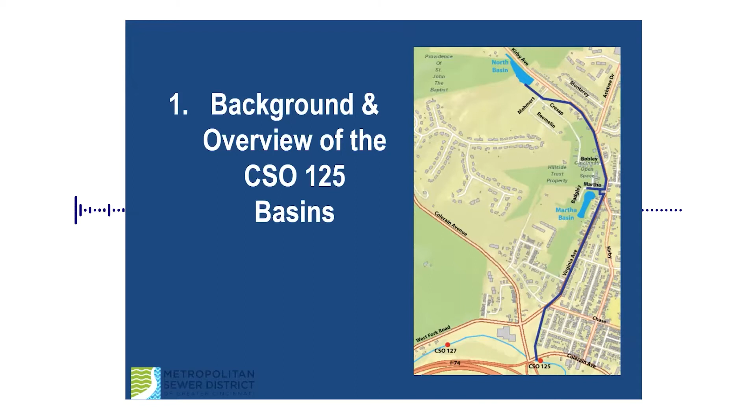So first of all, I wanted to give you a background and overview of the CSO 125 basins, and specifically point out what the project is, what the CSO 125 project is, just as a refresher.

As you may recall, we have the North Basin, located at the northern part of the project area along Kirby Avenue. We have Martha Basin, to the south. And then we also have a storm sewer that runs about a mile, taking the natural drainage, the stormwater from the drainage area, and bringing it down to the West Fork Channel. That's the location of the combined sewer overflow labeled CSO, Combined Sewer Overflow 125. So those are the major components of the project.

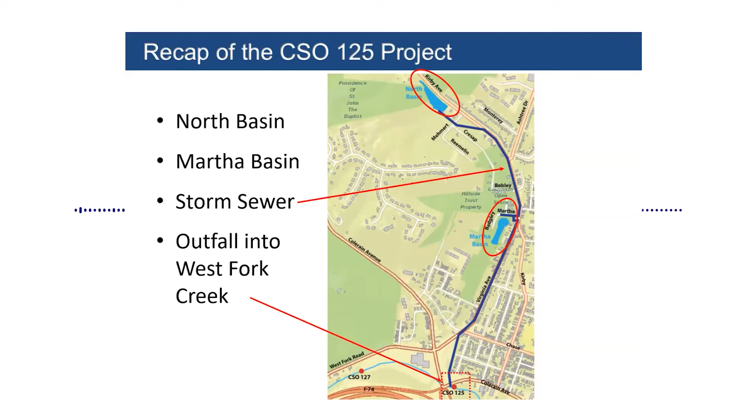Specifically, the project, the two basins and the storm sewer, were constructed as part of CSO 125 project in 2018, '19, and '20 as part of the Lower Mill Creek Partial Remedy. That was a bundle of projects, about 22 projects, that we constructed as part of our CSO control of the consent decree that we have.

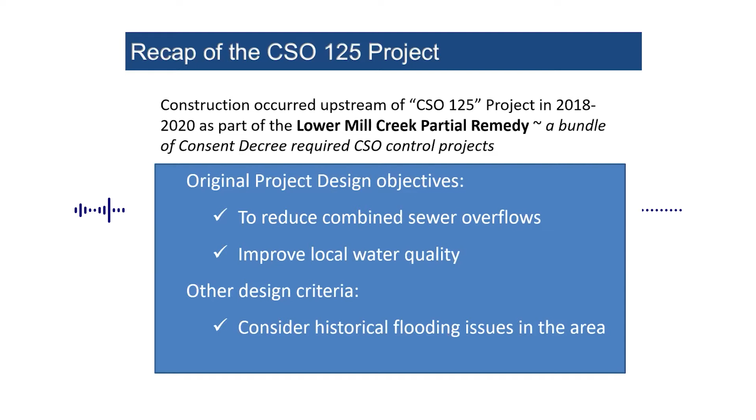The original project design objectives were to reduce our combined sewer overflows getting into the West Fork Creek, also improve water quality. The other design criteria was to consider the fact that there were historical flooding issues in this area, and the intent was to not make that any worse. So those were some of the design objectives and criteria used to design these projects.

So I just want to give you a little bit more of a deeper dive into the different basins that we have.

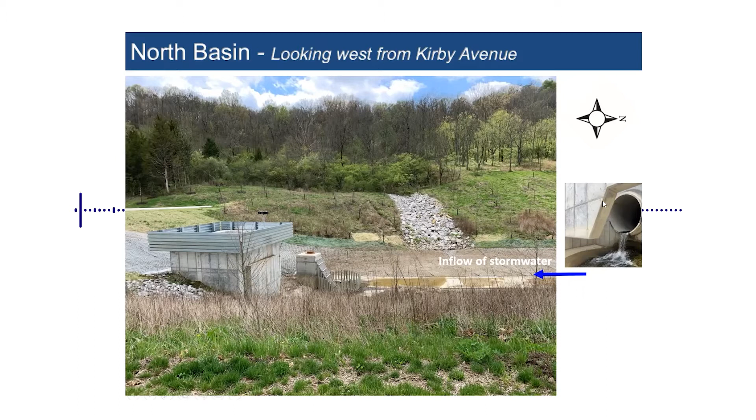Here's a visual of what the North Basin looks like if you're out there, looking west from Kirby. The stormwater is coming from the north into the basin, ultimately flowing through it, filling up in this area, and then this structure is how it gets into our storm sewer. We also made some additional modifications to this structure, and I'll talk about those. And again, the relief point to the combined sewer -- should there not be enough capacity in the storm sewer, there's an opportunity for the flow to get into the combined sewer as well.

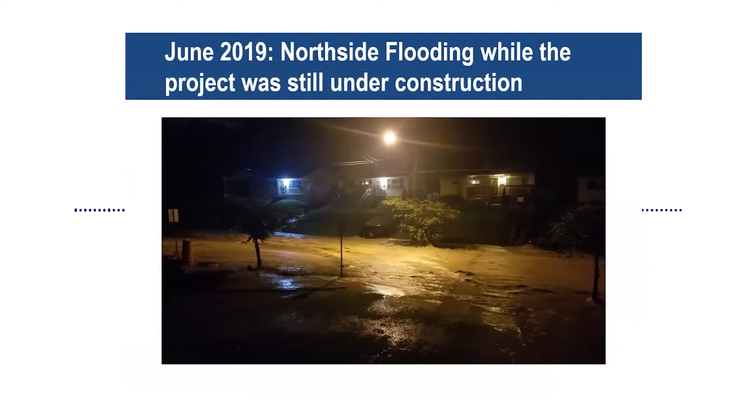The next thing I want to mention is the June 2019 flooding event that we experienced in Northside when the project was still under construction. This was almost 2 years ago, and we now certainly have more information than we did then. I'm going to go over what the conditions were that we were experiencing.

On June 15th and June 16th, there was a storm event that led to a significant flooding situation. Many of you are familiar with that, where the North Basin was actually still under construction. The rain events we had were first a 2-year event and then a 50-year event, which is much more intense, and it specifically hit this drainage area.

Whenever we have any kind of rain event, MSD has very sophisticated data from different resources defined specifically for that particular cell or region, a very small region of our sewer district, that tells us very specifically about how much and the intensity of the rainfall. So we know for a fact it was a 2-year and a 50-year rain event.

That resulted in an oversaturation of the soils, and coupled with the fact that the basin was still under construction and did not have any grass or vegetation growing on it, that did not allow the basin and the dam structure to stay in place. So what happened is that the dam on the south side of the North Basin was washed away during those back-to-back 50-year and 2-year storms.

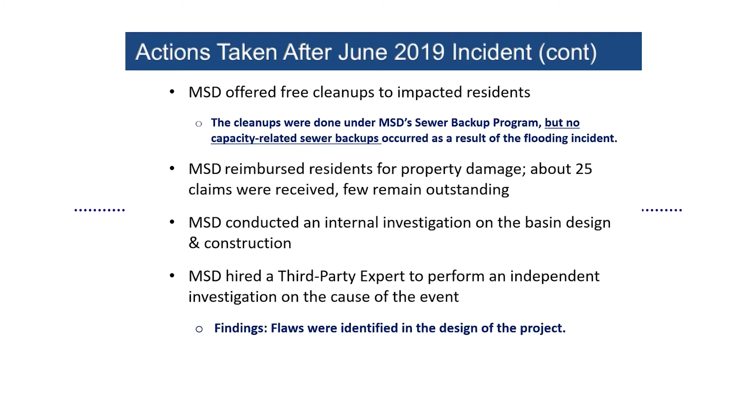That third-party expert did develop and provide a detailed written report of his findings. We made that report public in April of 2020. That was a report we provided to the city council—it's called an FYI memo—and that investigation was a public document.

Ultimately, the design flaws included—and Ryan Welsh or Diana can chime in on this—essentially, the third-party expert identified inadequate overflow structure, specifically at the North Basin, and insufficient freeboard, meaning the basin as designed and constructed didn't appear to have enough capacity to safely handle the flow of a 100-year storm.

It also lacked a spillway at the North Basin, and it recommended additional modifications to the spillway at the Martha Basin as well. There was also an identification of inadequate construction specifications, all detailed in Director Christie's memo to the city manager at the time, and in the attachment that was the third-party report.

So the flash point I'm talking about is, my property is directly south of the North Basin. There is a creek that runs between my building and the building to the east of me. That creek used to be much bigger, and there was even a bridge on Mehmert Avenue that went across this very big creek.

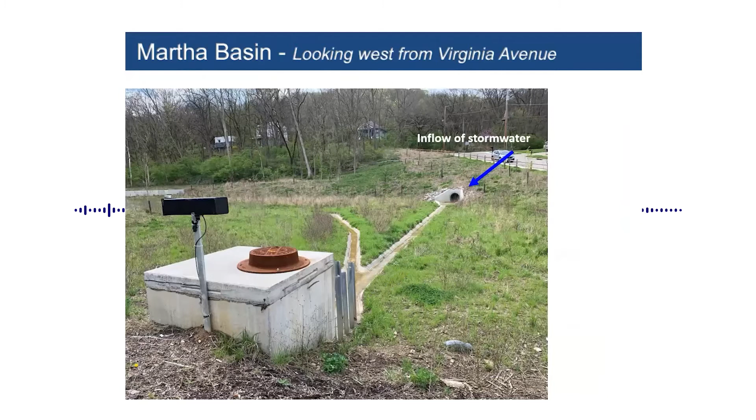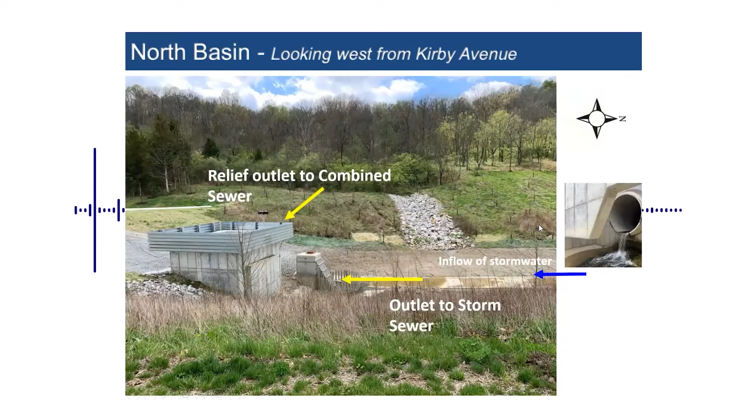So now this creek, this has sort of always been the situation before the North Basin. This has been the lowest point, where the water has started at Memorial and Kirby, from what I've seen. And the creek will still back up to the point where water is going onto the road.

It's due to just a very small hole and a lack of grading, I think, in that naturally forming creek. And especially whenever that secondary release would happen and the water overflows from that creek, I feel like it could potentially be contaminated water or something.

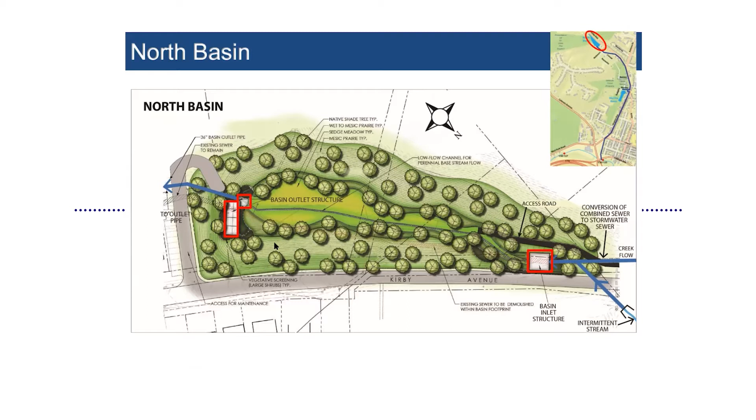Is this definitely upstream of the North Basin or downstream? South, that's downstream. Oh, downstream. So I don't think we modified any natural drainage between the North Basin and the Martha Basin.

Yeah, so it's an actual problem that wasn't addressed, right? So we have the North Basin, then we have Mehmert Avenue, which is the concrete street. And right across from that, there is this big depression where another pipe was put in. The woods were cut down, it was dug out.

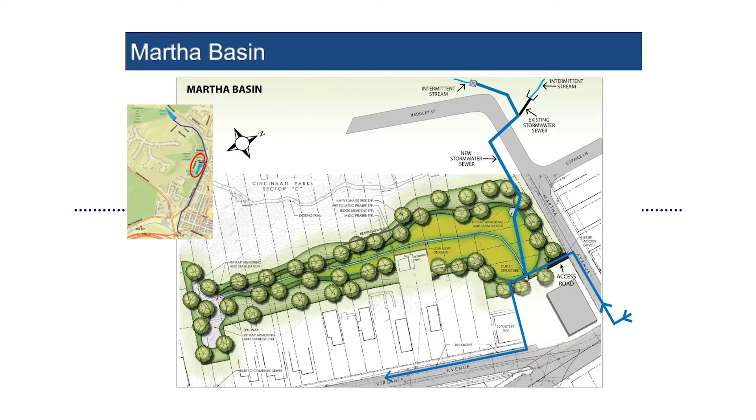I guess we would call it a spillway or not, but the issue lies literally in this creek that used to contain all the water. That's where the flooding used to start. You guys did the North Basin, but between the North Basin and directly south of Mehmert Avenue, this issue right there in between tends to still flood.

And there is a 10-foot, I think, sewer outlet right there, but the hole that the creek drains into is only about 6 foot big. It's a very easy fix, but I still see overflow happening right there, and it comes onto the street and it's part of the combined sewer. So it definitely concerns me.

Okay, we'll look at that. We can look at that offline and see what specifically you're talking about there. Could you give us the address? The address? 1811 Mehmert Avenue. I've talked to Deb a ton of times, and you guys have been so helpful with any problems I've had.

But I just feel like, not only to the west of my buildings do I have the oversaturated soil problem due to the really large pipe that was put directly uphill, but to the east of my building I have this capacity issue with the live sewer, combined sewer sort of system.

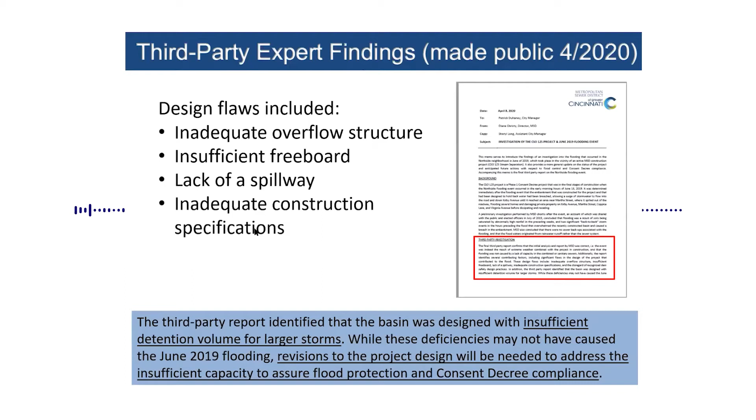Okay, we will take a look at that and be back in touch. I know that we do have your contact information. That's awesome, because when you were talking about the water flowing down the street or from the hill, we definitely don't have sewers on one side of the road. So there's just a lot of water that comes down that hill.

I think we're sort of at the bottom of a lot of hills, so we really just need to have some focus there. We'll look at it, and we'll also talk with our stormwater utility. They are also responsible, and of course, that's parkland in some of that area too. But we can follow up with you after this.

I do want to move on with regards to other actions that we took after the June 2019 event. As Mary Lynn, just yes.

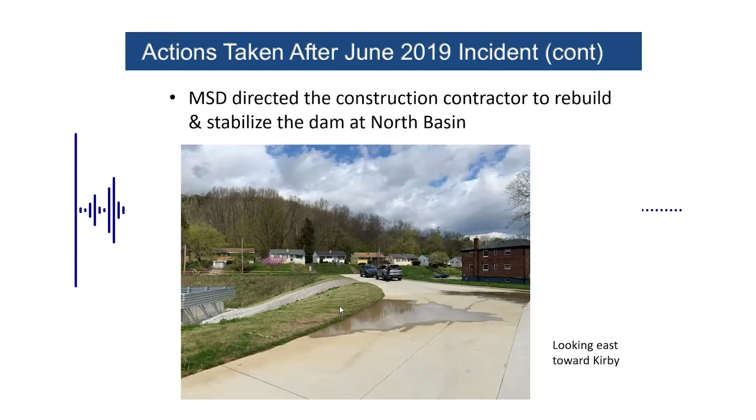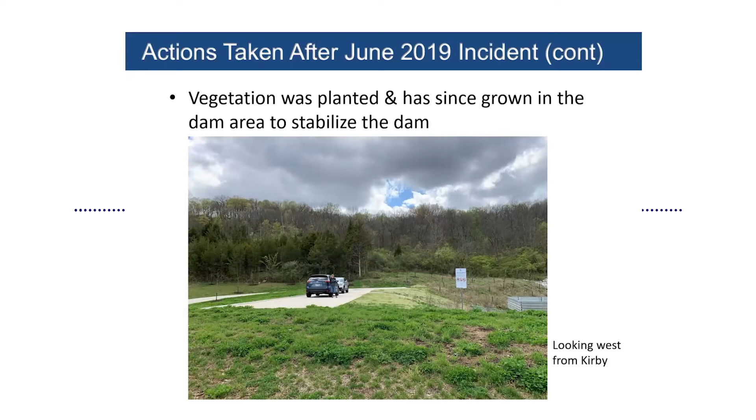Vegetation was planted and has since grown, and the root system of the vegetation is so important to help keep the dam in good shape, and also to keep trees off it, because tree roots would actually negatively impact the dam. That's why we like to keep structures like this covered with grassy vegetation. That is very effective.

When we have a rain event large enough to allow water to get into this structure, it is possible, and it will result in more stormwater getting into the combined sewer at that time. However, the storm is still diverting flow out of the combined sewage, so we are still getting CSO reduction. We just may not be getting as much as was originally calculated by the design engineer when planning this project, but there still is CSO reduction.

Just the fact that we have this new structure, a hole cut into the combined sewer. Within 4 days of the event, we modified this because of concern about the basin filling up the way it did, and for a reason we still have not been able to determine—and the third party was not able to determine—why the storm would not take on as much flow as we needed it to. So this 5 by 5 cutout was made, and it has since been determined that it actually is needed for that additional relief, and that the basin was not constructed to hold as much as it needs to for the criteria it was supposed to be designed for.

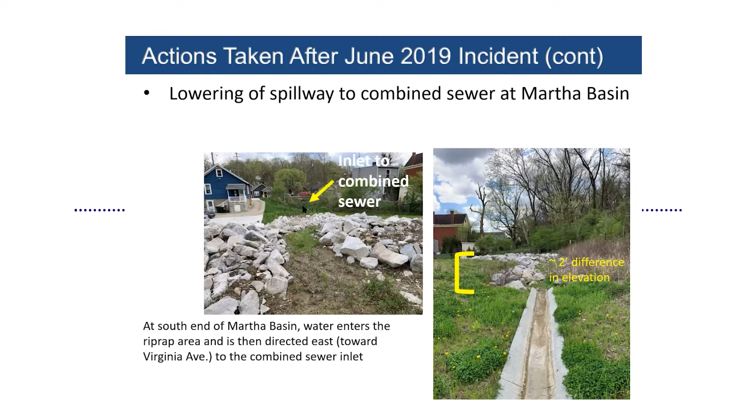Before we were able to do that, though, we had another 50-year storm that impacted the area, and we did receive a few reports of flooding on Virginia Avenue following the May 18th, 2020 event. That was a 50-year event, another significant storm, and the spillway backed up specifically because of high water down in the West Fork Creek.

As a precautionary measure, we had our crews at the Martha Basin pump out water from the Martha Basin into the combined sewer, and we were already planning to reduce the height of that spillway. We were able to do that shortly after the May 2020 event, lowering the spillway by about 1.5 feet. That makes it more effective as a relief point to the combined sewer, should it be increasing, because we don't want to create any worse flooding events.

There were a couple of technical questions in the chat I wanted to respond to. One was about the size of the combined sewer and the material. It varies between 96-inch and 120-inch, and the material varies too—some of it is brick sewer, some is concrete. If there's any follow-up on that, it can be addressed.

The other question was about whether there's a permanent solution for debris getting into the basins. I'll just say that this is the permanent solution—this is a maintenance item. Debris comes when branches drop and leaves drop; a lot of it's seasonal. When we get a rainfall, it flushes debris out of the woods. So this is normal, but it is a maintenance activity.

Okay, very good. It looked like Marilyn clarified her question a little bit, and I see Deb responding, so I just want to be clear—hang on, because it depends on which outlet structure you're asking about.

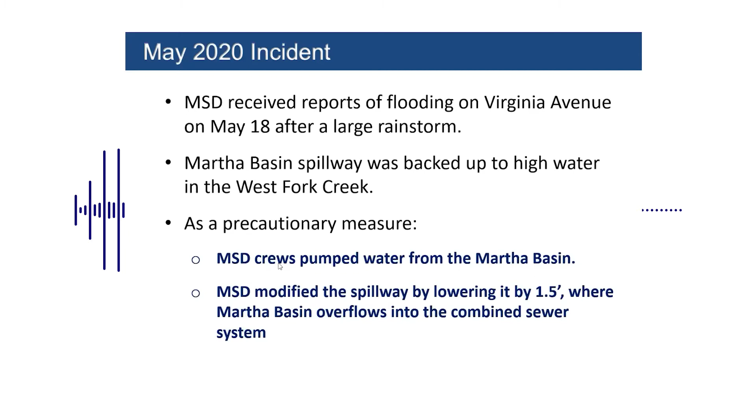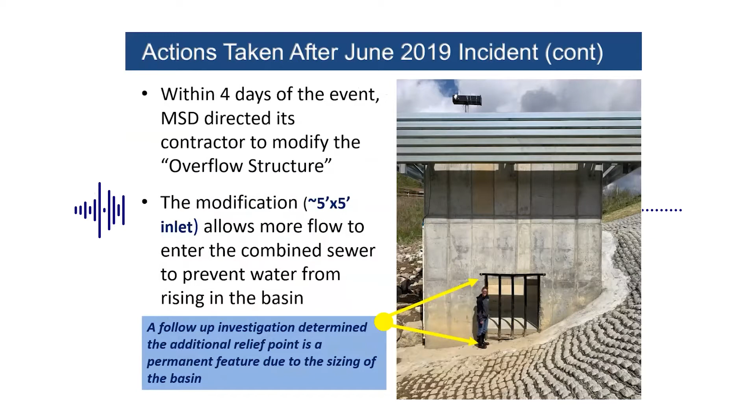I think she was asking about the one we enlarged, the constructed 5x5 outlet from the North Basin, which does go to the combined sewer. But I want to make sure she understood that there are 2 outlets in the North Basin—one goes to the storm sewer and one goes to the combined sewer. Yep, this is what goes to the storm. As you can see, it's a concrete structure, a raised structure that goes to a brand new storm sewer.

And then this is the structure that flow goes to the combined sewer. There's just another illustration—that's the cutout, it's concrete. I'll be addressing some of the maintenance issues in a little bit.

Was there another question you wanted to address in the chat, Ryan? I'm trying not to open them because I don't want to—but I think we're good. There was one thing I wanted to clarify that you said, that we were going to make a modification to the spillway at the Martha Basin prior to 2020. I don't know if we made that in response to a rain event in 2020.

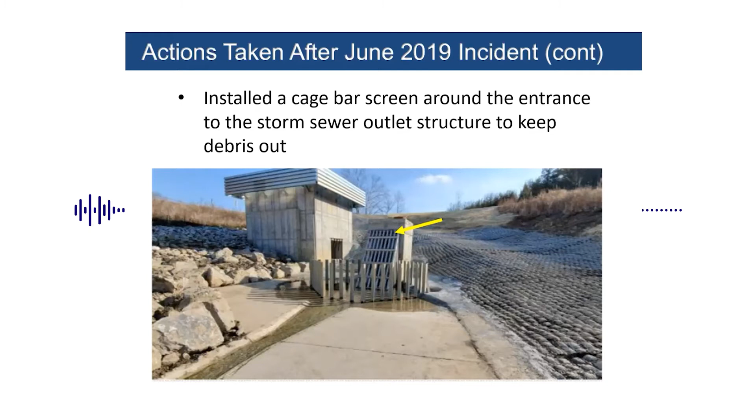The decision to do that wasn't made until May of 2020. It's a precautionary measure—it wasn't a result of any actual negative impact, but we thought it would operate better.

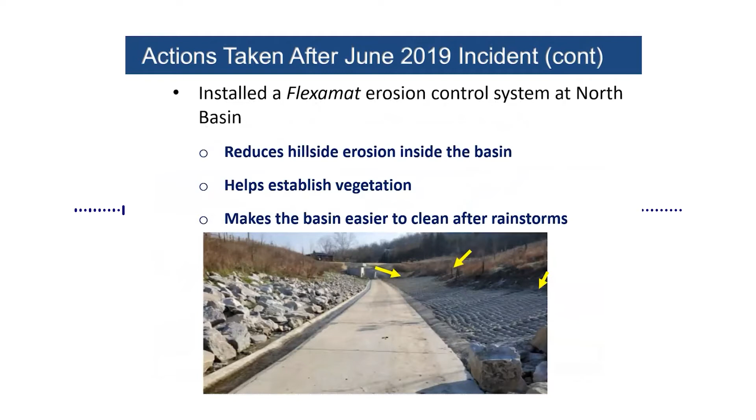Okay, thank you. Let me figure out where I was now. So, how the basins operate—we do have some illustrations, just some additional illustrations to kind of show.

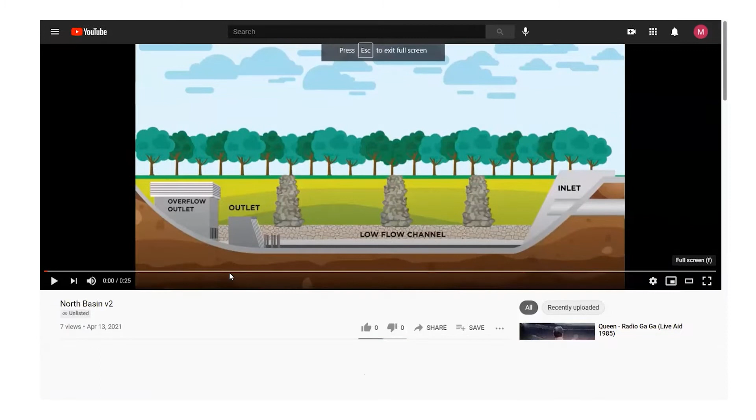Let's see if I can get to this real quickly. So this is just another illustration to show how the North Basin works.

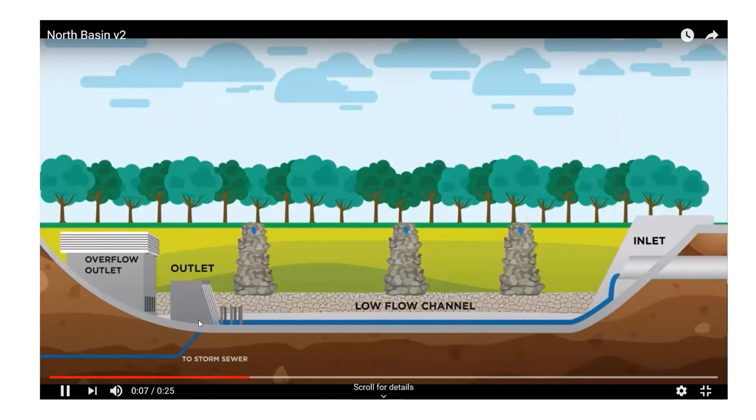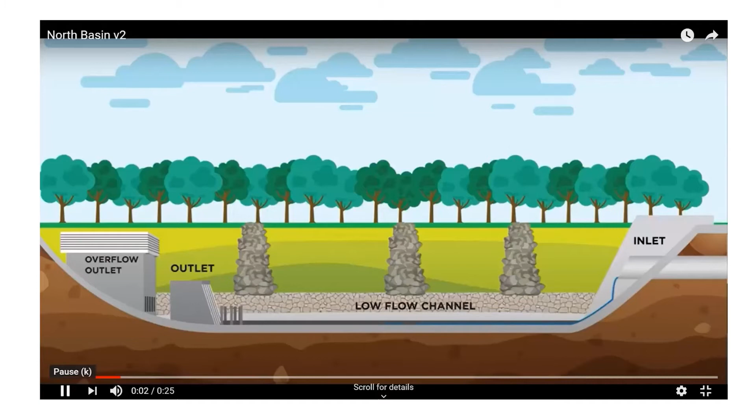So again, the water is coming in from the storm inlet, going down the low flow channel, getting into the storm sewer. Once it gets to a certain level, that's where it can get back into the combined sewer system based on that additional cutout that we created. And then of course it can also get into the overflow structure from the top as well, as is illustrated here.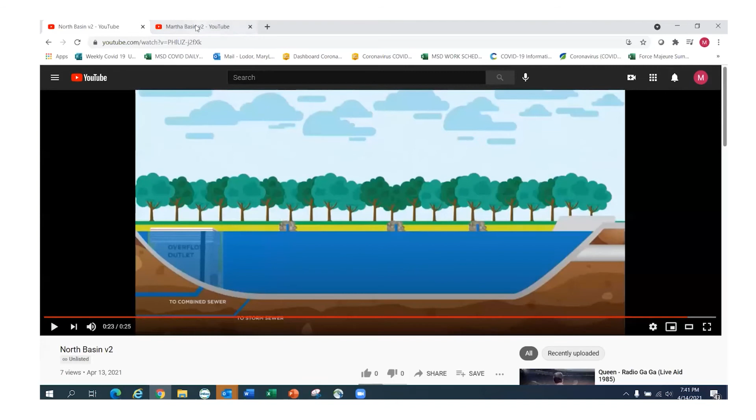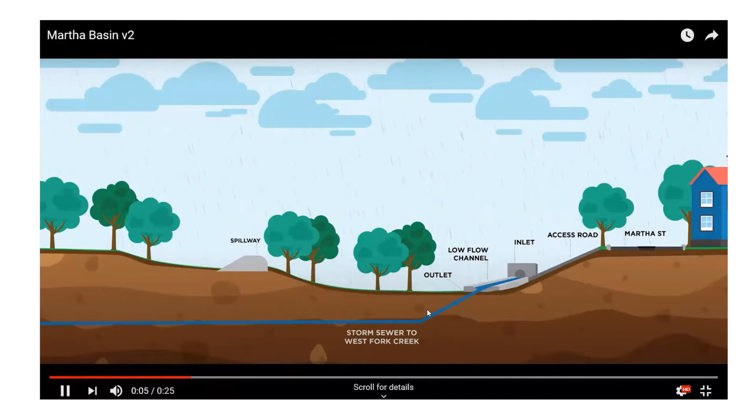So that is the North Basin, and then we have the Martha Basin, which again, the inlet allows the water to come in through the low flow channel, goes to the storm. As water is filling up, then the water can get up to the spillway, and that is where it will be provided a relief to get to the combined sewer from there.

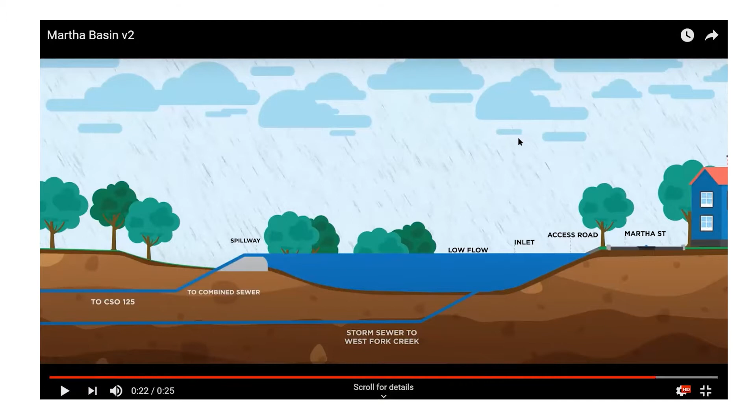So those are just some illustrations to help visualize how it actually operates.

So today's current status: the construction project was officially determined substantially complete almost a year after the June 2019 event. It was determined complete on June 30th, 2020. At this point, the dam is secure and has established vegetation. The North Basin does have the additional relief added with the 5x5 entry to the combined sewer. The Martha Spillway has also been lowered for additional relief.

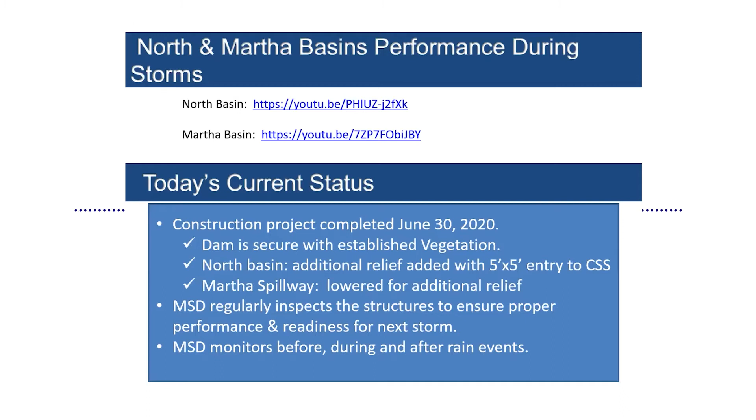MSD also regularly inspects the structures to ensure proper operation and maintenance, and to make sure it's prepared and ready to perform for the next storm. And then we also monitor the flows before, during, and after rain events.

So now I want to just highlight a few questions that we receive often. I'm going to go through those, for the interest of time, and then we'll open it up to other questions as well.

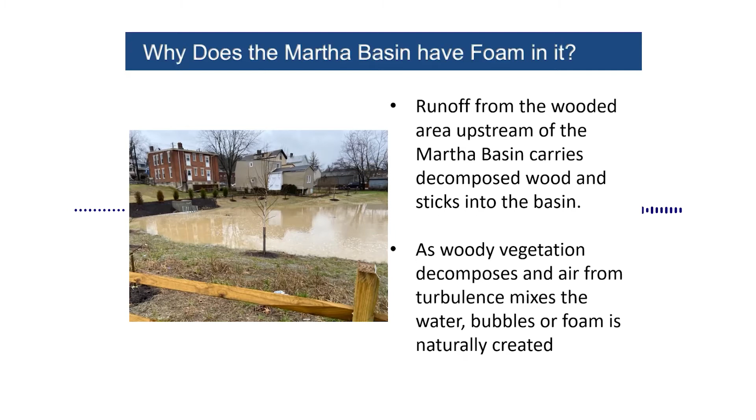So the question is, why does the Martha Basin have foam in it? Just generally, the runoff we're receiving into these basins is coming from natural areas, from wooded areas, which brings woody debris into the basin. As woody debris decomposes and air is introduced to the whole system, the woody debris has different natural organic oils that mix with the air and create bubbles and foam. So it's not unusual in a situation like this, in natural spaces, to see some kind of foam. It's not the kind of foam you see from detergents, which would be a different kind of real bubbly foam. This is more from the natural woody vegetation.

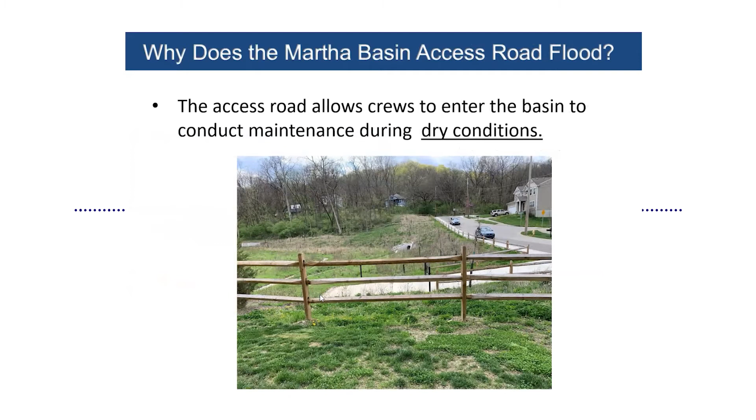Another question we often get is, why is the road out there flooded? The maintenance road was specifically constructed to perform maintenance in the basins during dry weather. So it's not unusual or unexpected that the access road would be underwater during rain events. We just want to point that out because that seems to be a common question.

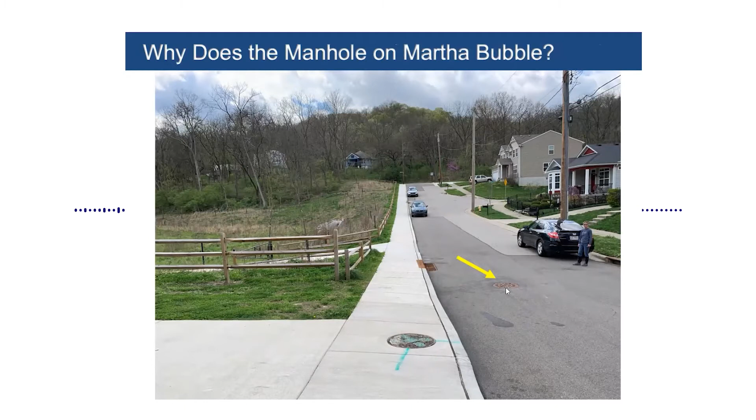We also saw a question in the chat about the Martha manhole, on Martha Street, which sometimes bubbles. The question is, why does it bubble? Going back to the several 90 degree bends we have in the sewer, this creates an inefficiency or additional pressure in that sewer line that causes the manhole to have bubbling tendencies. So we are evaluating different options to remove those bends, which would most likely improve the conveyance of water to the West Fork Creek, potentially making a straight shot and getting rid of all these bends. This was done in the design because of right-of-way issues, but we are evaluating that at this time.

In terms of maintenance, there was a question about maintenance earlier, about what we're doing on maintenance of the basins. We use both in-house and contracted resources to perform routine and preventative maintenance. Specifically, the contractors attend to the basins on a rotation of twice per month, doing weeding, picking up trash, mowing, pruning, looking for problems, and helping us address those problems.

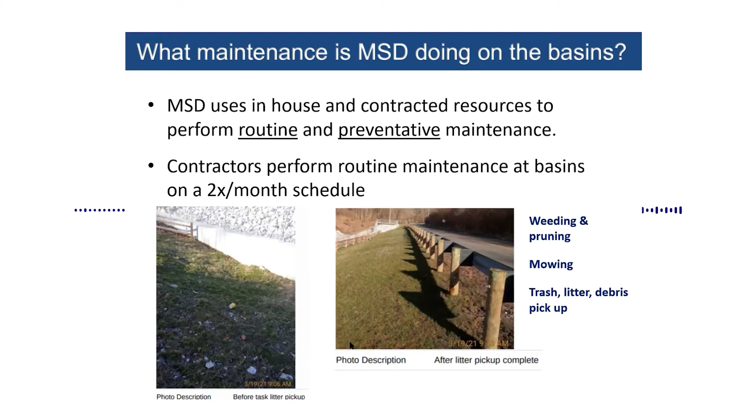MSD internal resources also inspect our basins after every large storm, which we define as anything greater than 1/4 inch of rain within 24 hours. We remove debris, look at structures, and look for blockages, again checking readiness for the next storm. You can see debris piled up here, which we clear out, getting the rocks back in their places and making sure the system is ready for the next storm.

Also during storms, we perform visual inspections to see how it's operating and to look for problems. We do that on a regular basis when we are experiencing rainfall.

In addition, we have cameras and remote monitoring equipment located at the basins. This is a visual showing a camera located on top of the structure at the North Basin, and as I pointed out earlier, we also have remote monitoring equipment located at both basins. This box is keeping some of the telemetry.

So do we want to pause here before we move on to next steps? Are there additional questions about some of the stuff I went over, or are we ready to move on?

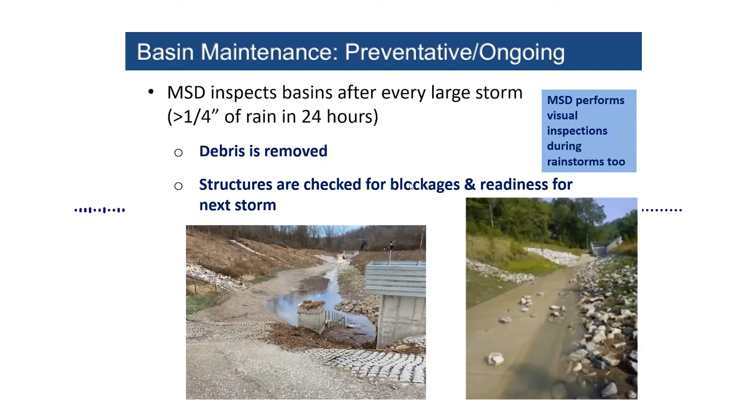If you could just real quickly pull up the slide from the beginning, with respect to the Martha Basin, Marilyn Wall asked a question about what the outfall structures are again, and what it outfalls to, at the Martha Basin. So we could quickly address that and then probably wrap up.

So this is actually a visual I'm going to use for the Martha Basin. This is the actual outfall structure right here. It comes in from this culvert, and the low flow channel is taking it to this outfall structure and taking it to the new storm sewer. If the basin's filling up, then another outfall structure is back here, and that's where the spillway is that goes to the combined system. So during most wet weather events, the stormwater coming in from this culvert is flowing down the low flow channel and exiting the basin through the structure on the other side.

I think that's sufficient, unless she wants us to continue. It seems like there's a lot of other questions coming in, but perhaps we can just finish the slides since there's only two more, and then we can jump into all the questions.

We did have a hand raised from Sue. I don't know, you lowered your hand, so I don't know if the question was answered, but just acknowledging that the hand did go up. Okay Sue, do you want to ask your question?

Well, it was really a comment. Prior to construction, I don't know if it was an MSD engineer or somebody from the construction company, but they met with me and another Northsider who at the time was leading our local redevelopment group, about purchasing the house on the corner of Martha and Kirby to avoid that bent pipe. At the time, the other person was totally against removing that house because there are a lot of people in Northside who don't want to see houses taken down. But I understand that property, which has been vacant the whole time we've lived here, which is 10 years, belongs to the Port Authority. And I'm wondering if there might be some relief. I know at the time, whoever we talked to offered to take it down and put a park there or something like that. So I just want to make sure you're aware of that, because maybe that's part of your solution.

Yes, we did actually talk to the Port Authority about that, and we are in discussions with them about the possibility of doing something to address that bend. We're at the very early stages of talking to them about that. So thank you for bringing that up.

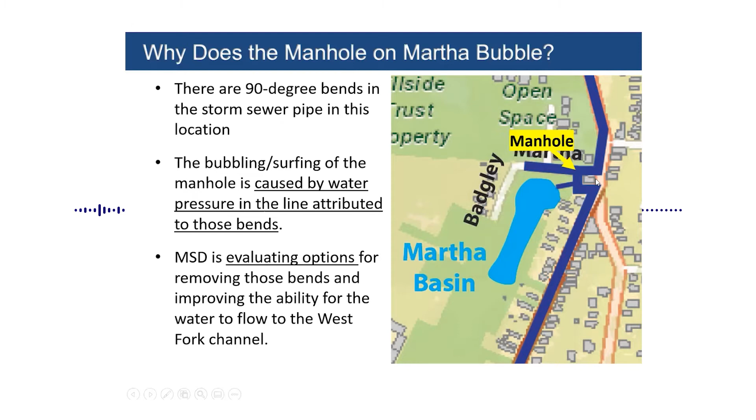Mary Lynn, I'd like to address a question that's in the chat about rainfall, because I think I tried to respond and there's been some confusion. And Eric responded, it looks like it's not just the amount of rainfall.

So for a 50-year event or a 100-year event, there are charts. A simple Google search will get you the answer. It depends on the area, but for our region it would depend on the amount of rainfall in inches, as well as the intensity of the rainfall and the duration of the rainfall. So it's not a straightforward answer, and it's not 4 inches and it's not 6.6 inches. It could be 4 inches that comes down in 15 minutes, I'm just pulling that number out of the air, or it could be 6 inches over a 1 hour or 2 hour period. But the answer to the question is it depends. What is a 50-year event or a 100-year event?

So I hope I didn't make it more confusing, but I just wanted to clear that up, that there isn't... we can certainly, yeah, absolutely. There's a lot of

Information out there about the 100-year events. Another way to think about it is a 100-year event is considered to occur at a 1% chance every year. That doesn't mean you're only going to see it once every 100 years - every year there is a 1% chance that you will experience a 100-year event. Then there are different percentages for every other storm out there too, and the lower the event - for example, I think a 2-year event is a 50% chance or whatnot. There's a lot of information about this, and people get PhDs on this stuff for sure.

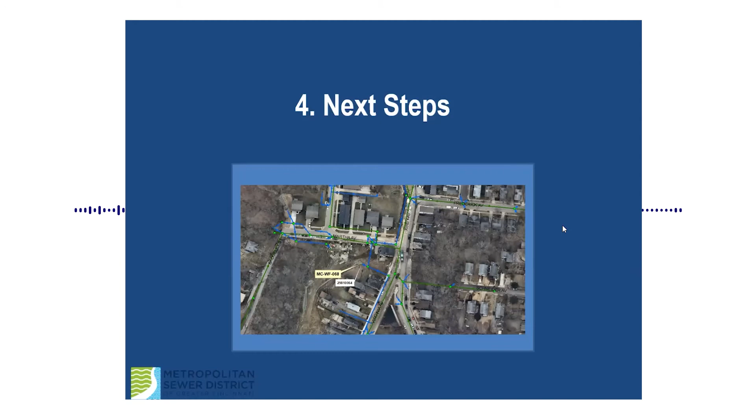That doesn't answer the question - what if it's not quite up to the spillway, but you still have water in the basin? Then it's going to outlet release into the storm sewer. At the top end of the basin? That doesn't make sense because the elevation is higher there - the elevation is lower at the north end of the basin. So yeah, the spillway at the south end is the higher elevation.

Okay, so you have no pipe near the spillway? No, it goes concrete over the channel - the spillway. The concrete channel runs actually backwards from the spillway, so it runs away from the spillway. So during dry weather, it flows down to the 36 inch pipe. It will only go over the spillway if, like Mary Lynn said, we get too much rain and it overtops.

Okay, and then what size pipe leaves the spillway? If it overtops the spillway, it returns to the combined sewer, which is 120 inches at that location. There's a 120-inch pipe at the bottom of the spillway? No, it's the existing 24-inch pipe, the existing culvert under the road that dumps into the 120-inch combined sewer.

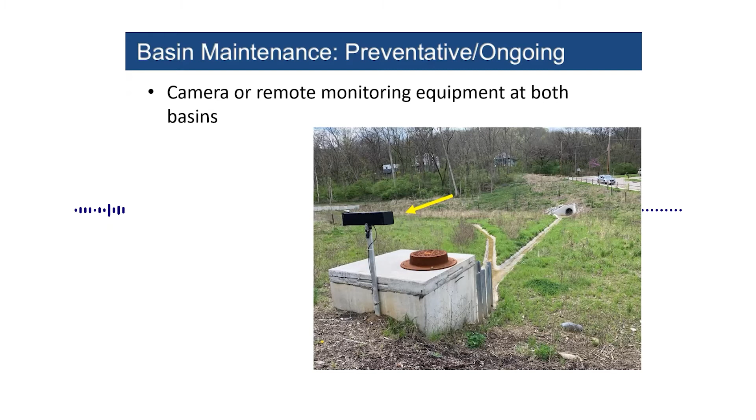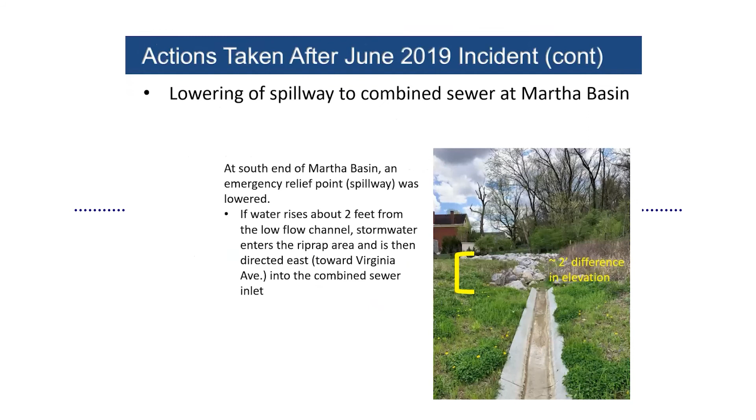Okay, is it 24-inch the whole distance between the spillway and the larger combined pipe? No, there's an open channel, a stretch of open channel. Here, I can show you a culvert that existed prior to the project that we did not install. You mean on the other side of this? Right, yeah, I saw it in one of the pictures.

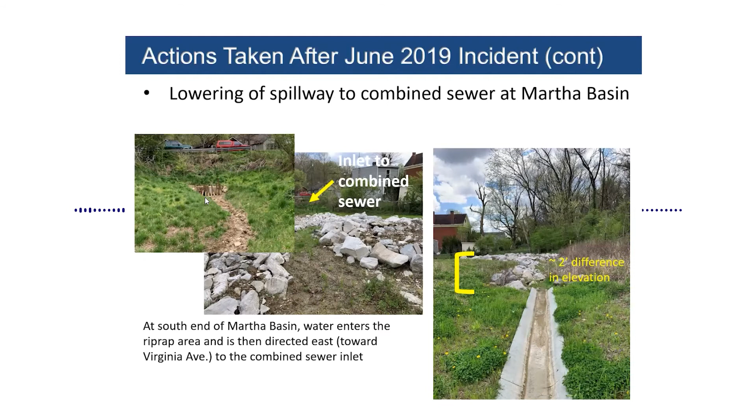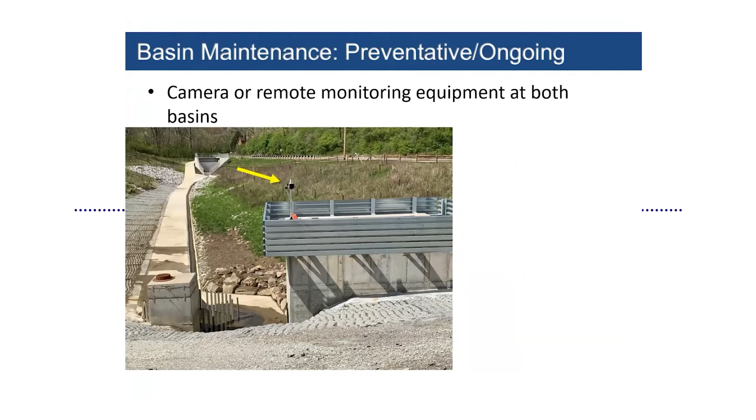Okay, are there other questions before we move on to next steps? Okay, hearing none. So then, next steps.

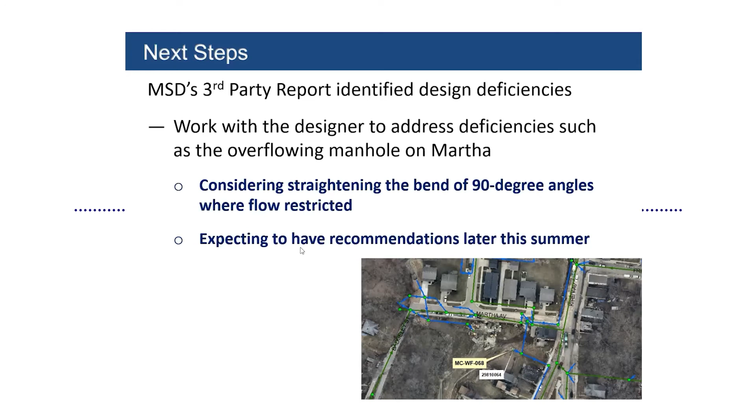MSD's third-party report identified the design deficiencies we mentioned earlier. We are currently working with a designer. Ryan's staff is specifically working with the designer to address those deficiencies, and the overflowing manhole and the bubbling manhole at Martha is one example. As we mentioned, we're considering straightening those 90-degree bends out to help the conveyance, and we believe that should address that particular issue. But we do expect additional recommendations later this summer to address those design deficiencies.

We're also, Ryan and his staff are working with the designer and others to evaluate the basin capacity and conditions, to ensure short and long-term safe operation. We've made modifications already, and those have proven very effective to date, but we're not done. We're continuing to look at what else might be good and prudent to do, and should modifications be required specifically of the dam for the North Basin, we will be coordinating and complying with the Ohio Department of Natural Resources dam safety regulations.

ODNR, the Ohio Department of Natural Resources, is the lead agency that has primacy over dam regulations. So we would certainly be coordinating with them should there be any need to make modifications to the structure.

MSD is also evaluating the Lower Mill Creek partial remedy compliance. The Lower Mill Creek partial remedy is made up of 22 different projects. It was developed in such a way that we have to achieve an aggregate, a total volume reduction with all of the projects taken into account, not just Lick Run by itself, and not West Fork by itself, and not Bloody Run by itself. By doing all of these 22 projects in a bundle, the compliance for them, the CSO reduction volume, is going to be determined and evaluated for all of them together.

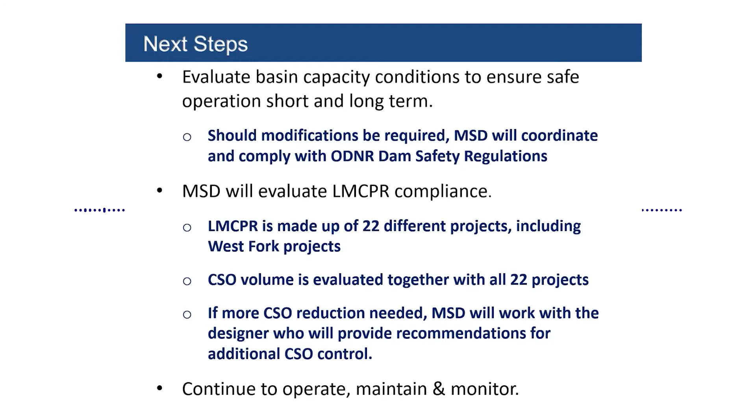And then, of course, we're going to continue to operate, maintain, and monitor how the basins are operating, from now until the end of time. That's just what we do. That's why we build these things, to operate and maintain and monitor them for the long term.

So with that, those are all of the slides that I had, and I did want to now turn to some of the questions. Let's see, I see another question from Maryland: Has MSD gotten approval from Ohio EPA and US EPA for the changes to the basins?

We have reported to the Ohio EPA, US EPA, and ORSANCO the modifications we made, and they were determined to be substantially completed with construction. We did have to make modifications for the protection of public safety. We'll be monitoring the effectiveness of the CSO reduction. If we need additional modifications to get more CSO control, that was always estimated and known when we were evaluating the revised original alternative for LMCPR. If we need more separation and to extend storm sewers in more areas to get more CSO reduction volume, we'll do that. That's really the point of the post-construction monitoring evaluation.

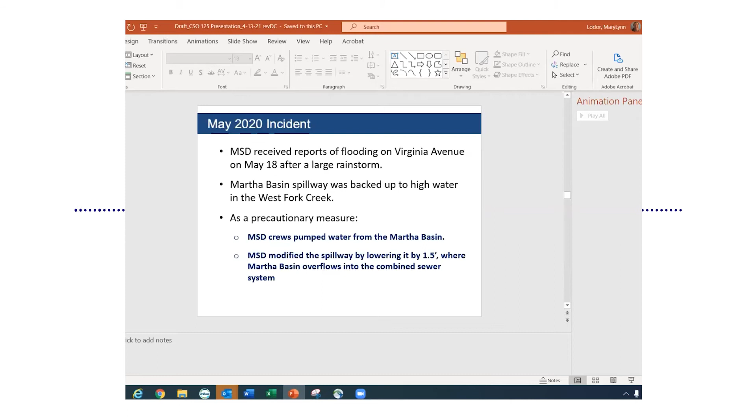It was two back-to-back very large storms that hit the north side area while this North Basin was still under construction. We had oversaturation of soils and the dam did not have vegetation on it, and that caused the dam to be washed away, which caused stormwater to flow out of the basin not the way it was designed to. It breached the basin berm, washed away, went right down the street, and caused significant flooding.

However, it was also a 50-year storm, and there are no storm sewers designed to convey that amount of flow. But because this basin was still under construction, with back-to-back storms, oversaturation of soils, and no vegetation - that is what our internal and independent investigation determined, and that report was provided. We can provide you a copy of the evaluation that was done to determine what caused the problem.

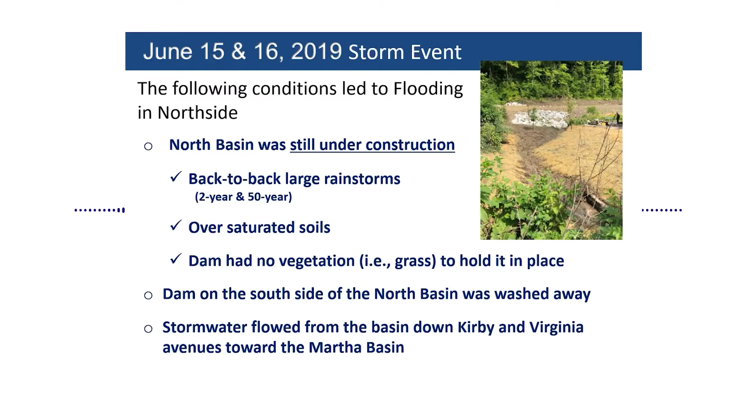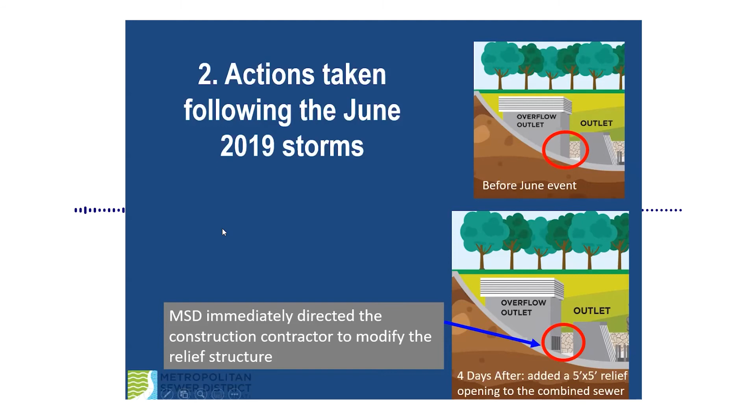I also want to respond directly to your question about the timing of the meeting. Yes, we had the report and made it available publicly a year ago - it's almost exactly a year ago today. I'm not making excuses, but we would have had a meeting last year. We did start doing virtual meetings, but this didn't take place, in large part, because of the interruption of COVID to all of our lives and work. It was really the beginning of this year when we came back and said we need to reach out to you all and have this meeting we promised last year. So I do apologize for that, and I'm glad you were able to join tonight, and we'll continue to make ourselves available.